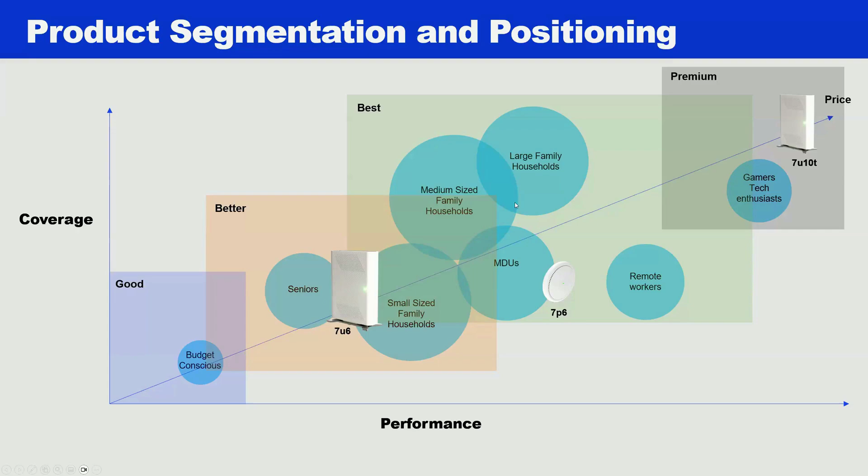We would love to say that everybody should be moving to Wi-Fi 7. That's not always the case, though. Wi-Fi 6 has a pretty large lifetime. I have other charts that I've shared with our customer base that indicate the adoption rate of some of the technologies takes time. So as we grow our portfolio, you're going to see this chart updated with other products that are going to fit a little bit more across the board. And if I click one more time, I'll show you the combination of products that fit, whether it be the Wi-Fi 6 scenario or the Wi-Fi 7 product family.

So again, a snapshot to consider when you're looking at developing a strategy for what system you'd want to use. Do you want to have all 6, 7 of these units within your purview? I don't think that's the best way to go. What we're suggesting is look at your sweet spot, consider what product you might want for that sweet spot, standardize so that you can benefit from cost savings associated with not only purchasing one or two of the systems, but also what it offers to you from an administration standpoint, from the overall installation process, the repetitiveness that you would go through over and over for your customers.

So with that, I'm going to ask a second poll question for you to participate. The question is relative to your market opportunities. So there's a mix here. There's 6 different options. And I'm really curious how broad you guys are moving in terms of your opportunity size. So we know that all of you are basically in the residential space, and we certainly expect that. But as you fill this out, consider the future. Consider possibly what you might have to be consuming in terms of the product in order to address those particular opportunities. And I'll give that a couple more seconds. And it's interesting, if you guys are watching the poll on the screen, I'm going to end it here pretty shortly, and you're probably not going to be so surprised by some of the numbers.

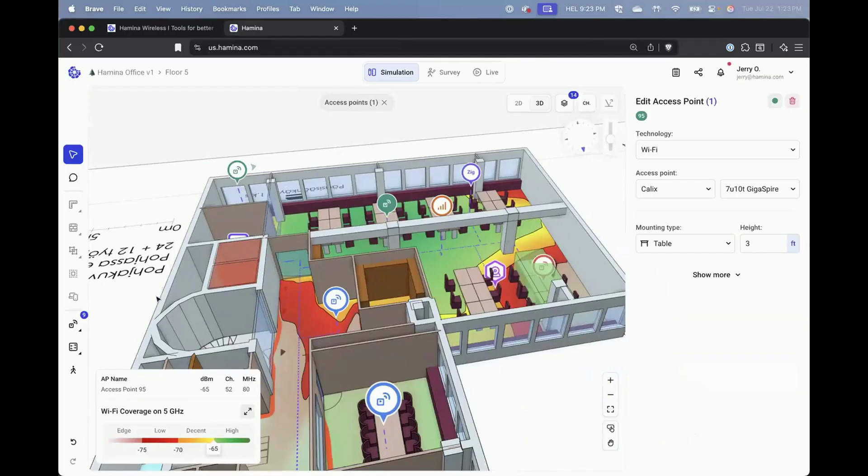So let me get my screen share going here, and I'll show you the network planner tool. All right, so let's jump into the Hamina Network Planner. And again, this is browser-based, so I'm just running this in my web browser here. If we go to the other tab here, I've already got my account logged in, and I have a project that I was working on previously pulled up. But let's start from scratch just to show you how easy it is to get started with the Hamina Network Planner. And I've got my colleague here, Joel, on as well to help me because I want to also show you how easy it is to collaborate.

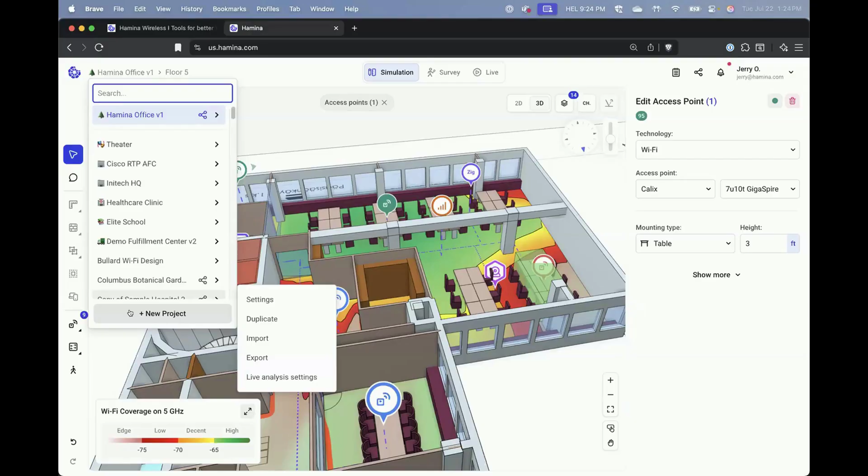So even if maybe you're not the wireless expert, or maybe you want to bring in some other expert to consult with, or somebody else within your organization to look at a project, we can do things like that as well. So what I'm going to do here is just create our new project. I'm going to call this one our Calix MDU. And we're just going to do a quick MDU design here.

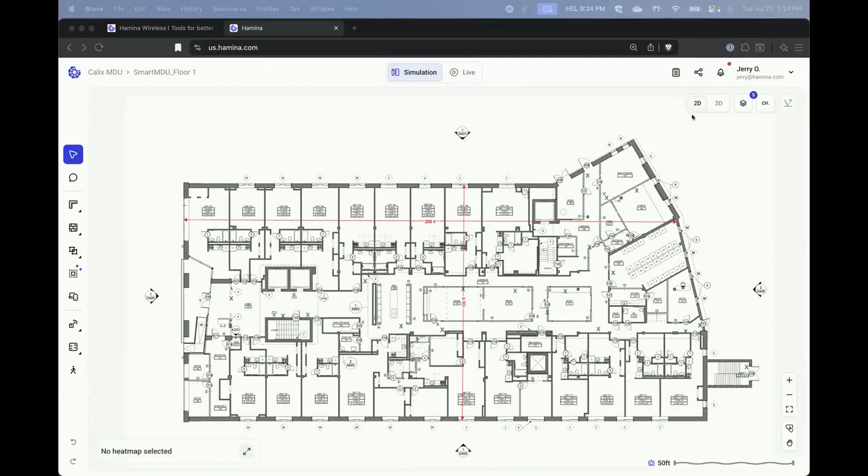So with a brand new blank slate here, I'm just going to drag and drop a couple floor plans in here. Now, when it comes to floor plans, these can be anything: JPEG, PNG, CAD files, PDFs, you name it, right? Anything you can get your hands on, even photos of a fire escape plan. These are JPEGs that I pulled in here, so nothing fancy about these. But the real power of Hamina is its ability to interpret these floor plans and understand, from an RF propagation model, what we need to model in this environment.

So in this case, it's identified, okay, that's a floor plan. It automatically set the scale for me. It also identified that there's walls and doors and things like that and drew those in for me. So very easy to get up and running with, and really minimal time and effort to start modeling an environment and simulating how that signal is going to propagate through this space. And obviously I can go in here and tune all the knobs. By default, it's saying, okay, I think there's some drywall, there's some wood doors. I can change that. I can customize the materials that are in the environment.

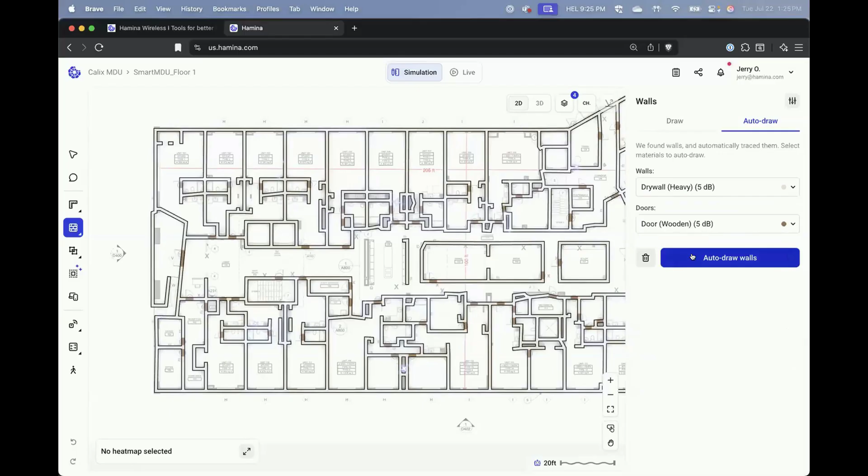I can add my own materials, but it's got a pretty comprehensive database here to help you get started. That's going to cover most common kinds of construction materials that you're going to run into. But even from there, like I noticed there's some elevators here. Right now, it just identified those thinking that's drywall around that elevator.

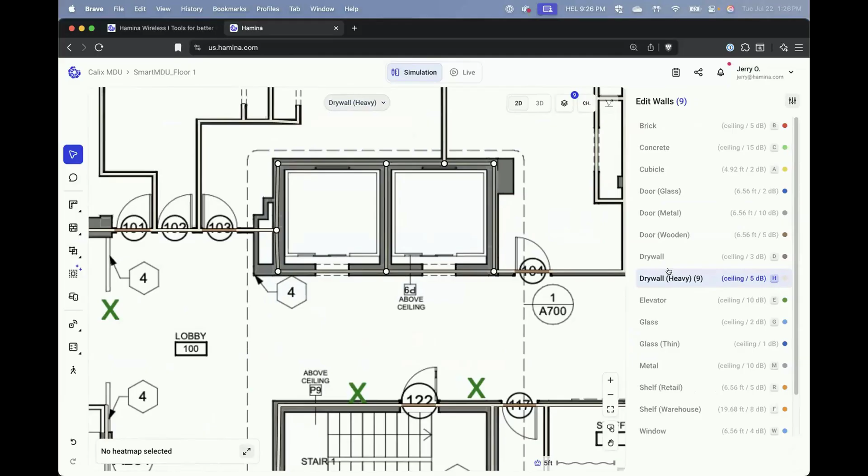So if I want to kind of tune this model here, for example, by selecting those walls, and I'm going to say, okay, those walls, all that heavy drywall that it's modeled as right now, is actually supposed to be elevators. All I have to do is select those, swap those out, and now you can see we've got some elevators drawn in here. So really at this point, we're ready to start doing our RF modeling if we want.

Also, before I forget, I'm going to share this project. So I'm going to share this with my colleague, Joel, and that way he also has access to it. He can kind of keep tabs on me. He can get in there and make some changes, but maybe that's just for project management. Maybe they want to just be able to track the progress of the design as they go through.

They want to be able to check in and see what the bill of materials looks like as I build this out. So you can share that project with either individuals or with teams of people as well. So it's very easy, being in the cloud, to collaborate in real time with other folks.

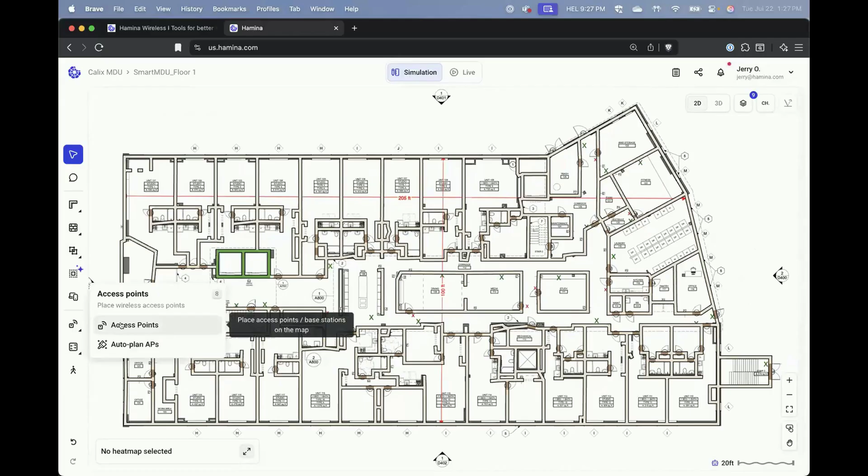But let's say we want to go ahead and place some APs in here. So I'm going to go ahead and select Calix here for our vendor, and we're going to choose from our nice extensive database here. And I know John was talking about a few different APs in his list. So let's try a couple of different ones for this design to play around with to see what might make the most sense. So maybe we want to start with something like a 6.3 here.

You can see right away we've got the antenna propagation model here modeled for you in 3D. So we can see if we put this thing on top of a table, that's essentially where the signal is going to go. The red or the darker the color, that's more of where the energy is being focused. So if we look at the bottom of it, we can see not much signal projecting downward. It's all kind of out in what we call omnidirectional.

If we look at it from the top, we can see it's really going in all directions around there. So a nice omnidirectional pattern, but it's meant to be put on a table. So that's going to be our default mounting. And then we can set the height of that table. So if you're putting it on top of a bookshelf, for example, you could adjust for that.

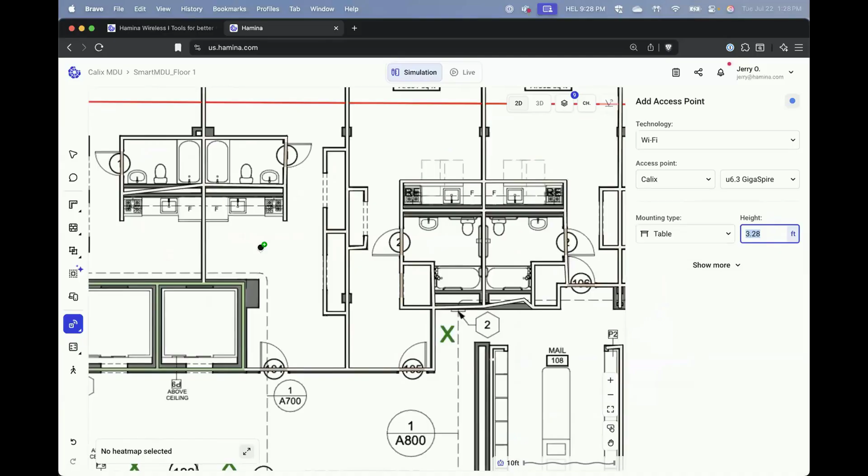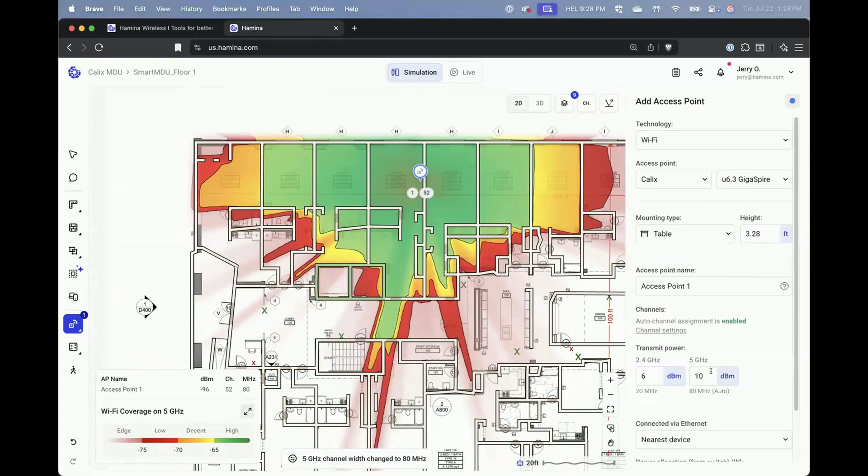But let's just place one of those in the environment here. And we'll place it kind of near this elevator. Maybe we would put it in the studio area, maybe near a wall. And now we can see immediately what that signal propagation is going to look like based on the default parameters of the radio transmit power.

So this is where things start to get pretty interesting, pretty powerful, right? Being able to that quickly simulate the signal and the coverage of this AP. So let's just focus in on having one access point in here, one u6.3, and what that signal propagation is going to be. And then let's go down to our client experience piece of this.

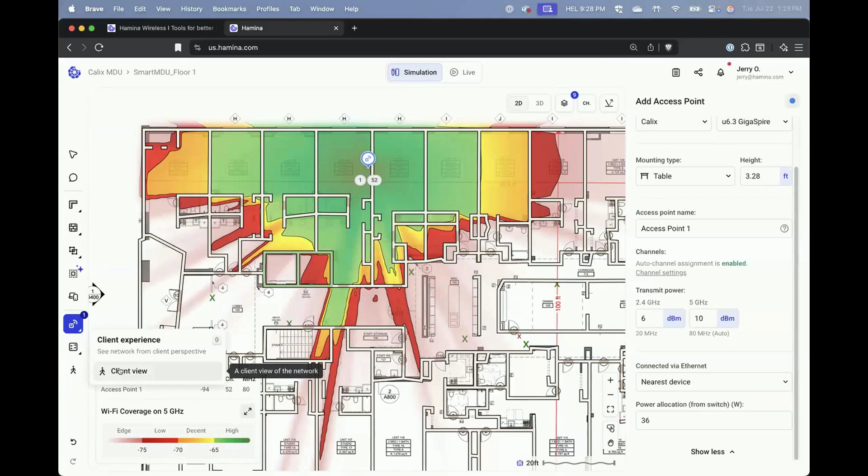So what I'm going to do is select a simulation here of a client. We can simulate different types of clients, maybe an Android phone. We can specify what that phone's capabilities are. John talked a little bit about their new Wi-Fi 7 product lines. Maybe we'll want to do some comparison with this particular model, not being a Wi-Fi 7 capable AP.

Even if we have a Wi-Fi 7 capable client, obviously it's going to work perfectly fine with that from a compatibility standpoint, but we're not going to get all the benefits of the higher MCS rates, the higher data rates that you'll get with a Wi-Fi 7 client. However, you can see even with this AP not being Wi-Fi 7, we're still getting very good speeds, very good throughput out of this one access point.

However, as we start to build this out, what's going to end up happening is we're actually going to see that data rate probably go down. And the reason for that is going to be that right now we're using 80 megahertz wide channels.

And that's great if that's the only access point that's in this space. But in reality, especially in an MDU space like this, obviously we're going to need a lot more access points. In addition, we've got to factor things in vertically as well. There's actually a second floor to this building, and there might be other buildings you're working on, let's say, that have 10 floors. We need to factor in the vertical signal propagation as well.

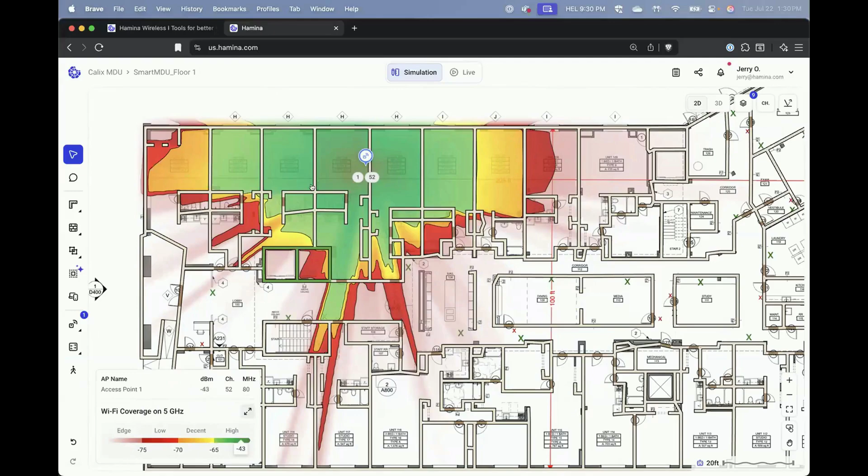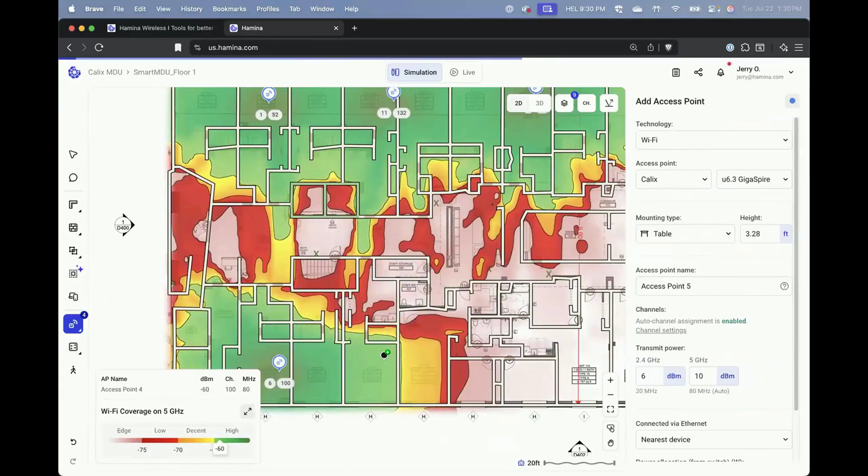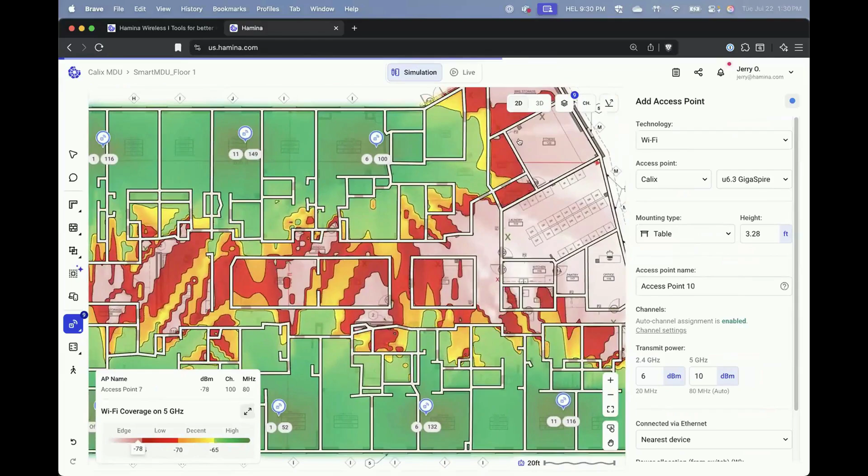So what I mean by that is as we start to build this out, if I just start to place maybe several more APs in here, one of the things Hamina is going to start to do is suggest different channel widths that we can use based on the number of APs that we have in this environment. So you'll notice as I continue to add more and more APs into this space, eventually it's going to tip the scales and tell me to use a narrower channel width. So as of right now, we're at 80 megahertz wide channels, but as soon as I add maybe another AP on the floors above or below, it's going to start to reduce that.

So maybe we put one in the study area here, maybe in this area. There you go. Now you can see, as I started covering the main areas here, because we've got APs on both sides of this, they're starting to actually interfere with each other with those wider channels. So now it's actually dropped our channel width down to 40 megahertz wide channels, which is a good suggestion. That's what Hamina is recommending here, based on some of the other automation features that Hamina has to help guide you on what channels and channel widths you should use in your deployment configuration.

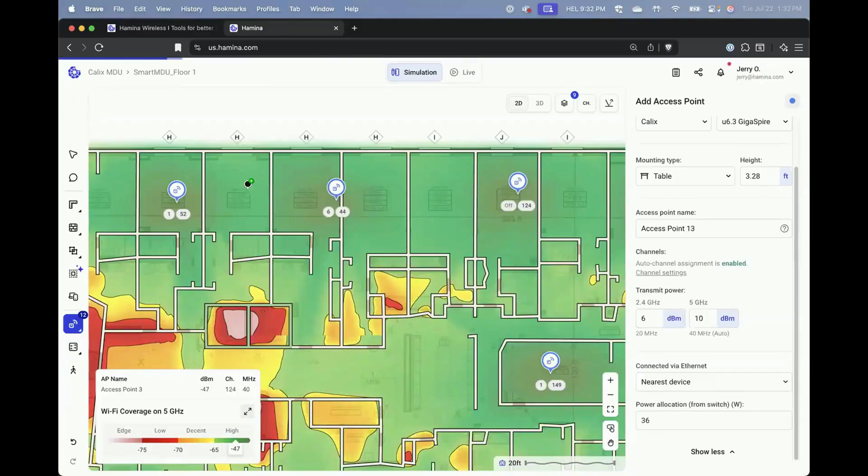So in this case, we're actually saying try to use as wide of a channel as possible because it's going to mean higher data rates, higher throughput, until we start to run into the radios themselves interfering with each other. And actually, in an environment like this, not only do we probably have our own APs to compete with, but we probably have other technology in that space that we're likely going to be competing with as well. So that's another consideration, especially when you do a site survey. It's going to show you what other types of interfering sources might be in that space.

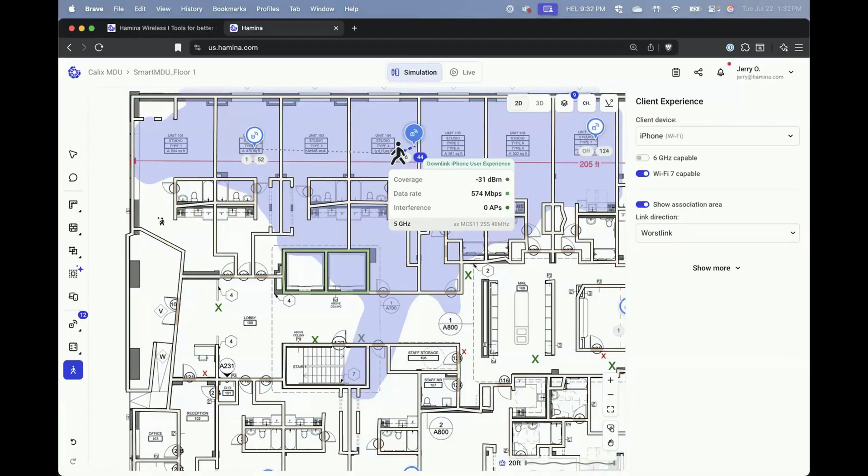But let's say we're good with this now, and if we just want to go back and validate our client, sure enough, our data rate did cut in half because it dropped our channel width in half based on the number of APs in this environment. So with this current deployment where we're using the U63s, this might be an optimal design for this type of space. And maybe that's going to be our starting point. And then we'll look at swapping that model of AP out for another model, maybe a ceiling mounted P4 as well to compare.

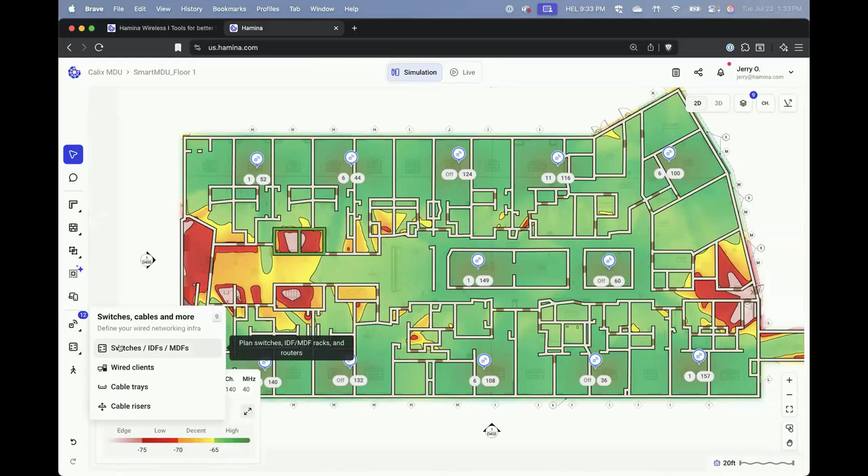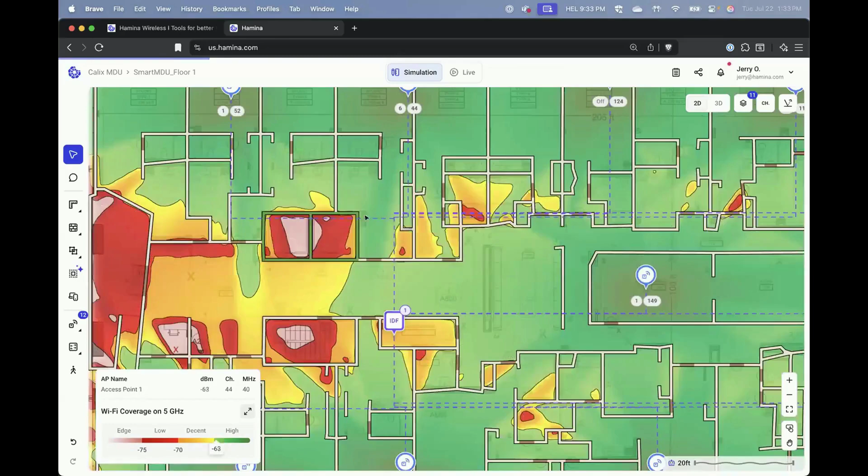But let's say we want to cable all this up, right? So one thing that we could do is input something like a switch or an IDF or an MDF to indicate where that is on this particular project. So let's say this storage room here is where our IDF is located. So I'm going to go ahead and place that on the map. And notice, as soon as I place an IDF on the map, it's going to route cable paths to all of these APs. Now, probably not the most realistic. I see I've got a cable going through the elevators here. So that's not going to work. But we can clean all that up.

And actually, I might leverage Joel for the sake of time here. I'm going to consult with him to be my cabler to actually draw some cable routes for me in this project. So he's over in Finland, I'm over here in the US, and I can actually leverage him to consult with to do some cabling for me. So with the IDF, that's where our equipment is going to be stored.

So MDF is our main distribution frame. IDF is our intermediate distribution frame. This is usually where the ISP comes into the building. That's where your MDF is going to be. The IDF is going to be off of that. So typically you're going to have your MDF where the main equipment comes in, and then maybe on other floors throughout the building, you'll have some intermediate ones.

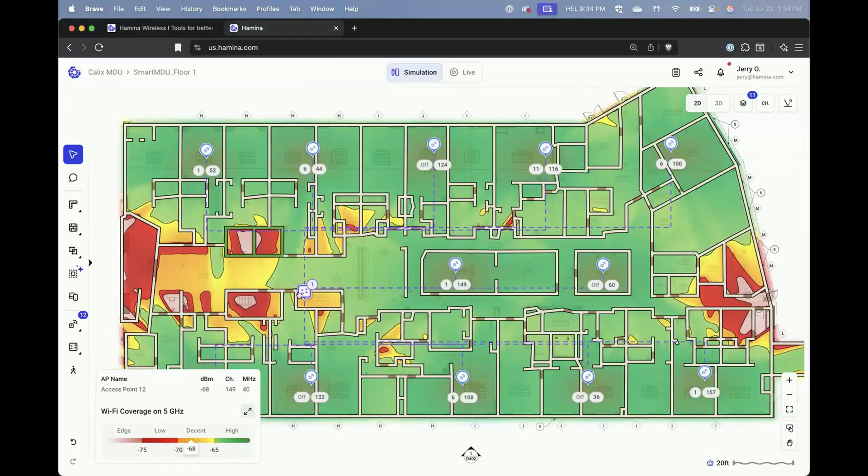Simpler than that, just specify something like a switch, right? That might be even more realistic for this type of deployment. You may not have a full rack and IDF and everything. We might just have a single switch or something in that closet. And that's perfectly definable as well. Yes, intermediate distribution frame. Thank you, Joel.

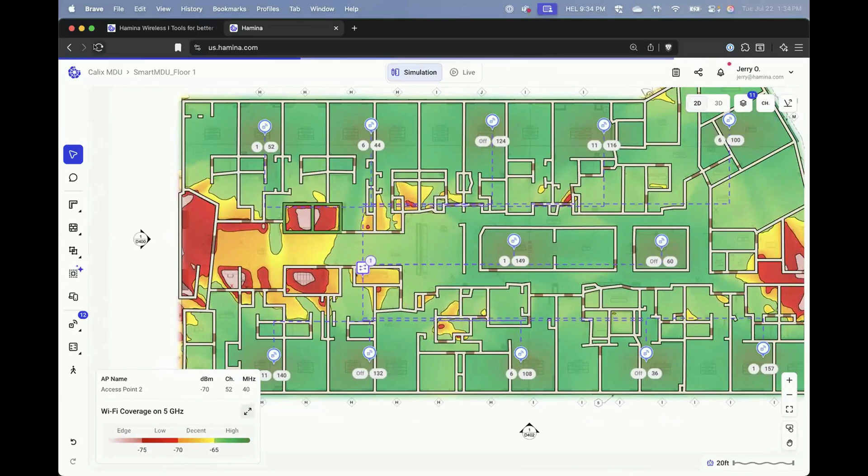All right, so let's say we've got this all defined and we need to clean this up. So Joel, are you able to do some cleanup of my cabling here? I did, yep. I threw some cable trays in there, and then it just snaps all the cables into the cable trays and routes them to the closest IDF, MDF, or switch. Beautiful. There you go. Oh, I missed one. I'll get that last one.

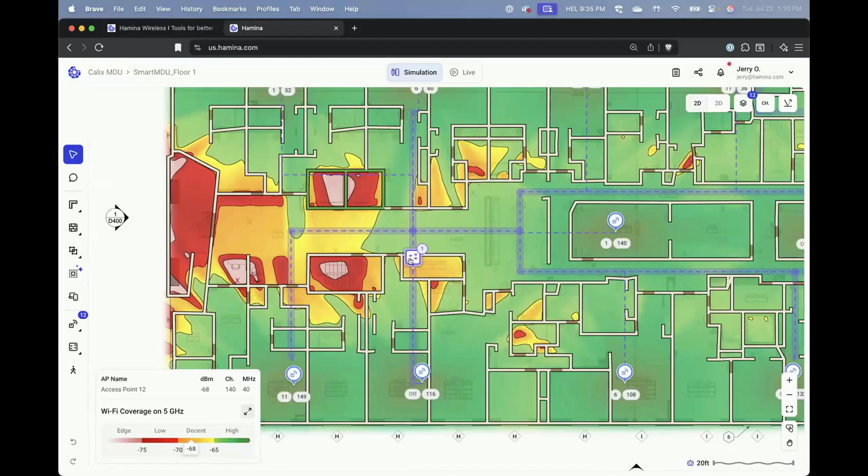Yep. So here Joel drew in these. I could have done it as well, but I was chatting away. So while I was explaining what an IDF was, Joel was doing all the hard work here, defining all these cable routes throughout the building to suck those cables into these cable trays, to tell the equipment how to get back to our switch here. And that can be for power sourcing equipment or just for data, in this case, since we have some tabletop APs.

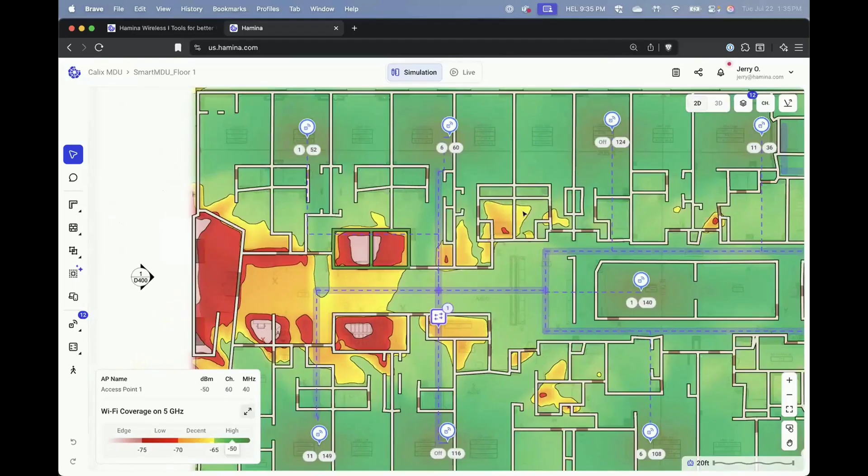But now that we've done all this legwork of modeling up this environment, all our walls and doors and all that kind of stuff, the cool part is we can run through all sorts of different scenarios really quickly, even with our cable trays and cable routes defined in here. So let's go ahead and swap out these APs. Let's select all those APs. Right now we have all the U6.3 GigaSpires.

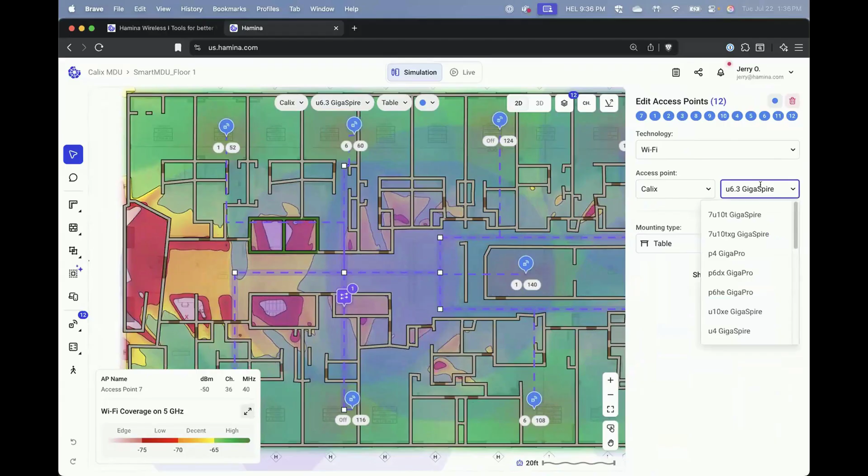And let's swap those out for something a little more drastic: what if we want to try putting some APs on the ceiling? We'll keep the APs in their current locations and I'll make them ceiling mounted. And now we can see, okay, if we put these APs on the ceiling, we can move these around and get them in a more optimal position.

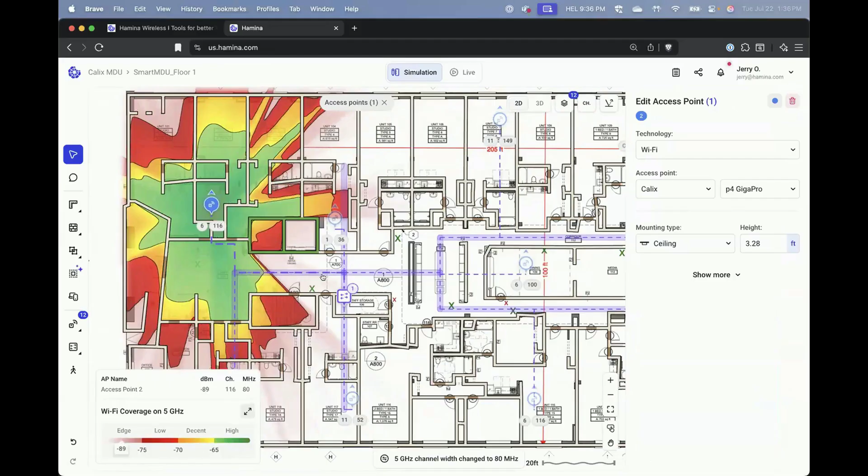And notice how with our cable trays already defined, our cables automatically recalibrate themselves into those cable trays. So that's the beauty of setting all this up, setting up where your wired equipment's going to be, where your APs are going to be. And as we move these around, you can see how they snap into our cable trays, so we can figure out exactly where we want to put our APs.

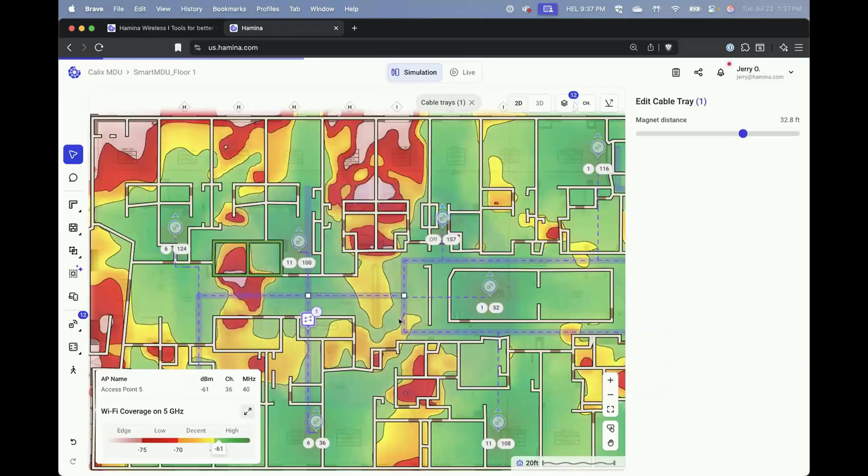We can also simulate different things like power levels. So now we're using a PoE powered device. If I come back to our switch here, you'll notice under our power and cabling details, with swapping out that AP, it's going to show me how much power I need at my switch to power all this equipment. So no longer are we using a tabletop, plugged-in access point. We're using ceiling mounted access points to show what that configuration is going to look like.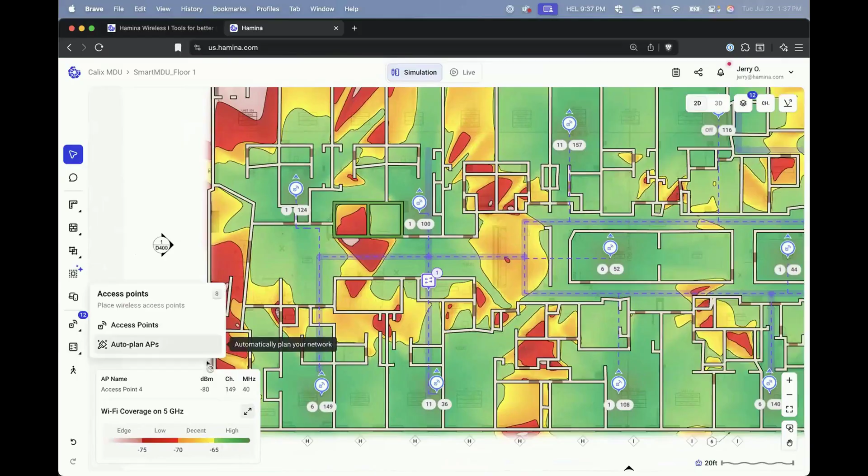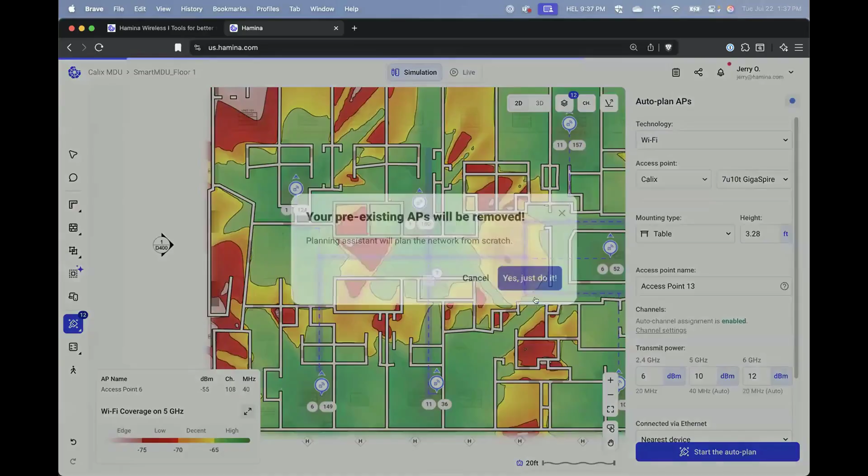Another thing that we could do is, let's say we want to simulate different models of APs, I can go to the auto plan here and we can choose different models of APs and run a simulation. You could pick the models you want to simulate with and just tell it to do a design that meets specific criteria. As long as it's more of an omnidirectional AP, you should be able to use this in this type of environment.

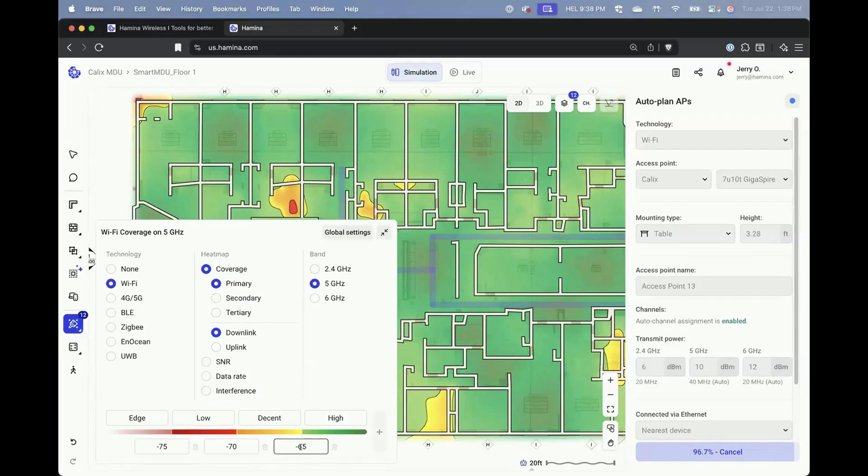So what it's going to do here is take all the information that we've input into this project so far about the environment, but also the requirements, saying we're going to have a specific target of good Wi-Fi. So if we need to design Wi-Fi for an entire building with very little effort, this way we can do it very quickly.

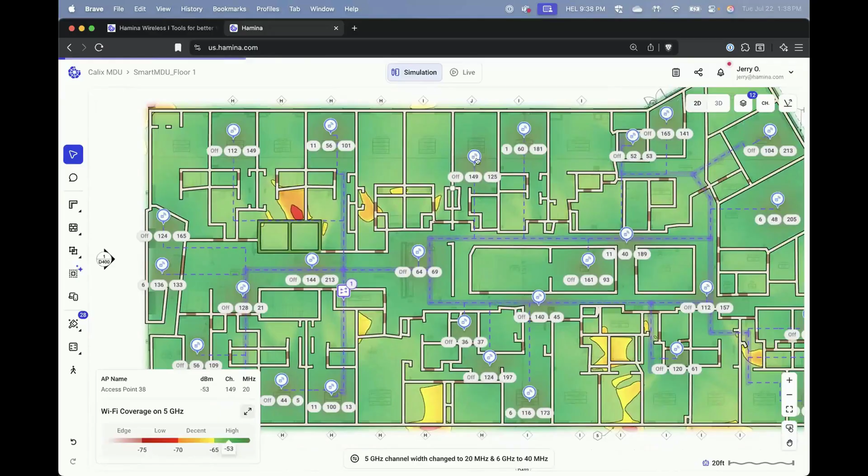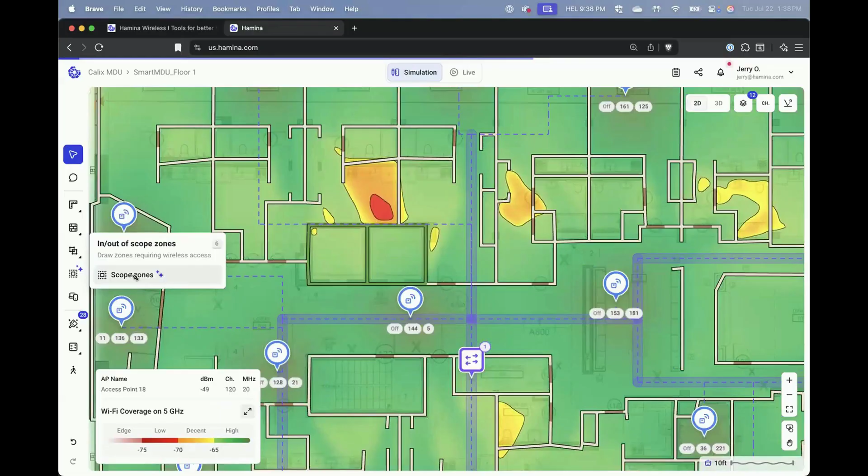So here it's placed all the APs for me in all the areas that are currently defined as in scope, but maybe there are areas that we want to mark as out of scope. Right now it's even trying to cover the elevators. So in this case, maybe what I want to do is say the elevators are going to be out of scope.

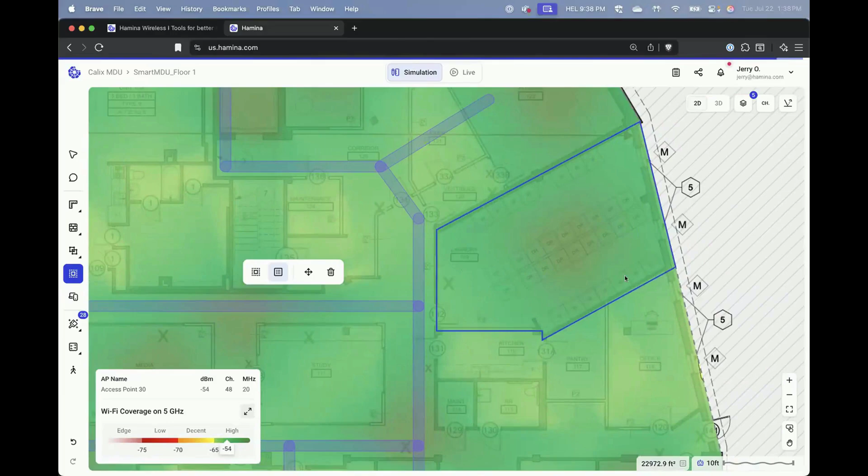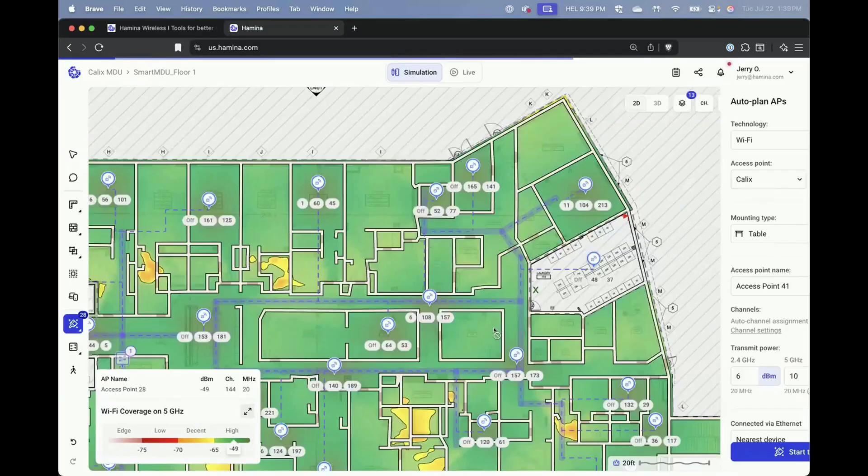We don't need Wi-Fi maybe in there, maybe the same for the stairwells. So you can mask those areas out from a project and actually input what areas are needing coverage, this laundry area, let's say, just to mark a few other areas as maybe out of scope. Maybe if it's like mechanical areas, you might want to also mark those areas as being out of scope as well. So in this case, we'll mark this area as out of scope in this project, and then you can rerun your auto planner to try to design around those areas.

So very easy to run through multiple scenarios. Jared, there was one question in the chat from Anthony Simmons asking, with the exclusion and attenuation areas, the predictive also considers wall dB measurements or obstructions, correct?

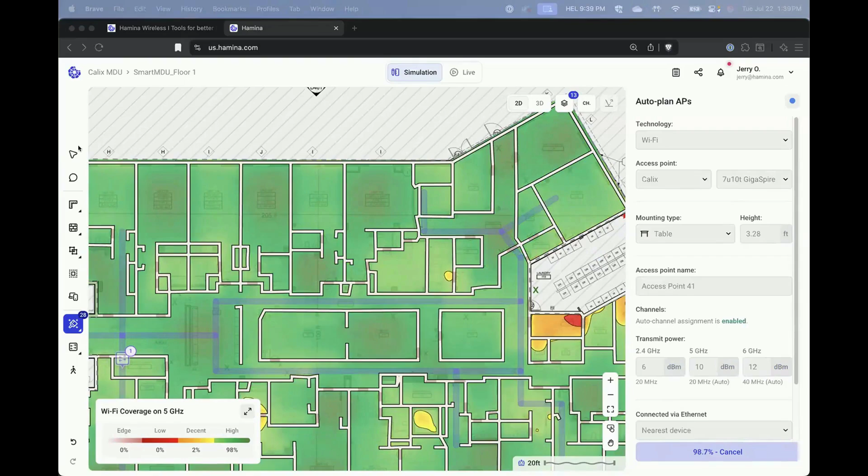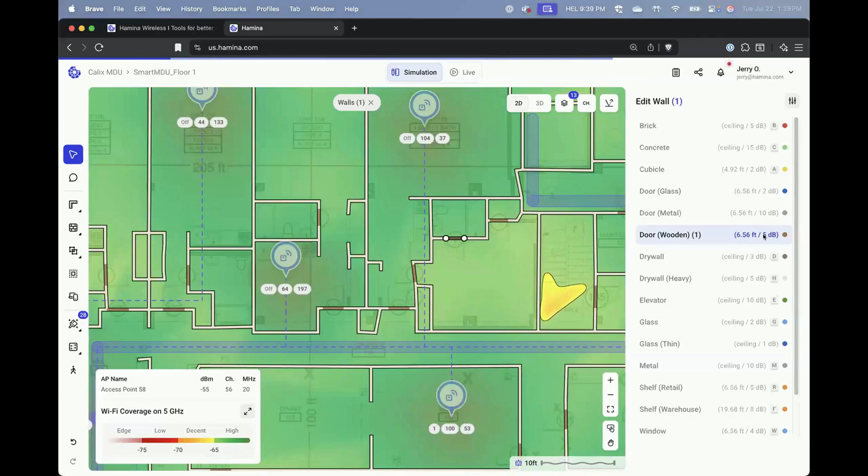Correct. So in this particular project, what we're factoring in is, if I go to the walls and select one of these wall segments here, we're saying drywall, and that's a 5 dB loss. So that is attenuating the signal at 5 decibels as it passes through those interior walls. In addition, we also have modeled things like the doors, and that happens to be a wood door, which is about the same attenuation properties as a heavy drywall of 5 dB.

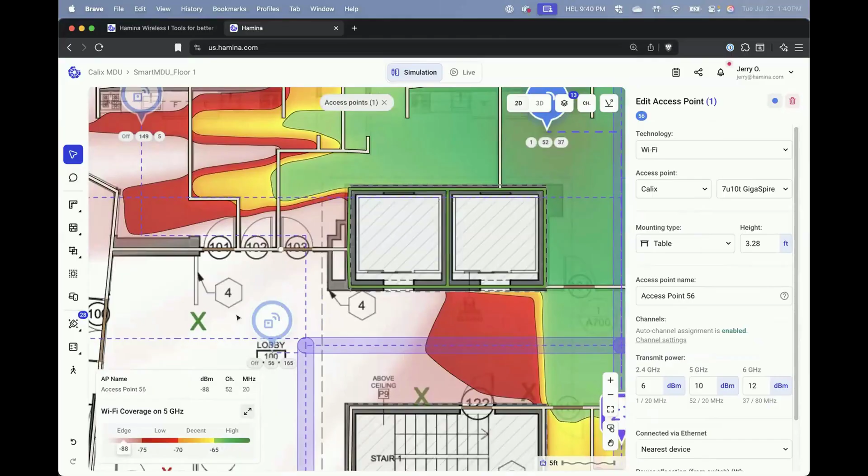But then if we go over to our elevators, big difference there. That's 10 dB of attenuation for each of these elevator walls. So very high attenuation in comparison to the rest of our interior walls. And we can see that here, if I select a single access point, we don't even really get any signal out the opposite side of the elevators, versus where we have just our walls. You can see it's evenly spreading throughout this space.

Thank you. Yeah, thank you for the question.

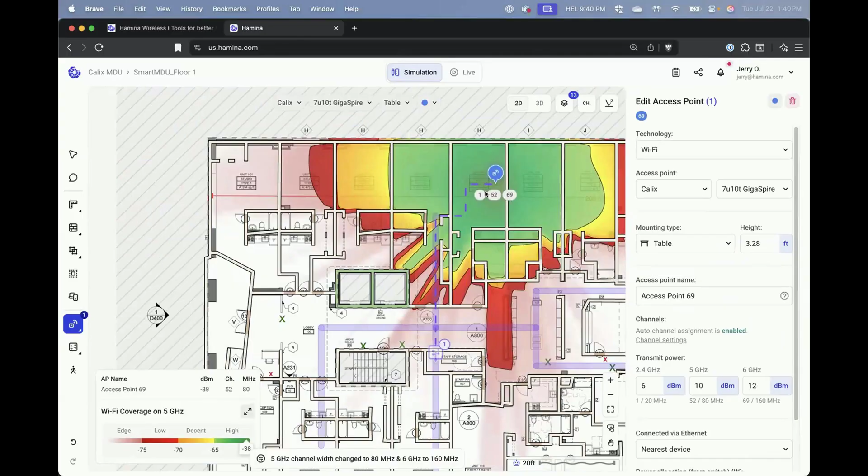Let me show you one more thing here around AP placement. Especially getting into Wi-Fi 6 and Wi-Fi 7, and specifically 6 gigahertz capabilities, I'm just going to place a single AP on here. What if we put the AP at the front of the unit to start? I want to show you how big of a difference this could have on the user experience. If we install the AP here, but the users are primarily going to be using the Wi-Fi in the back part of the studio, what does that mean to the user experience?

One, I can see right here, most of this energy is bleeding out into the open area here. We're losing a lot of that signal in this back area. So if I select a client here, and we take an iPhone, and we'll say in this case it's going to be 6 gigahertz and Wi-Fi 7, and we put that user back here, we can see they're still getting a good user experience. And again, this is with the Wi-Fi 7 capable

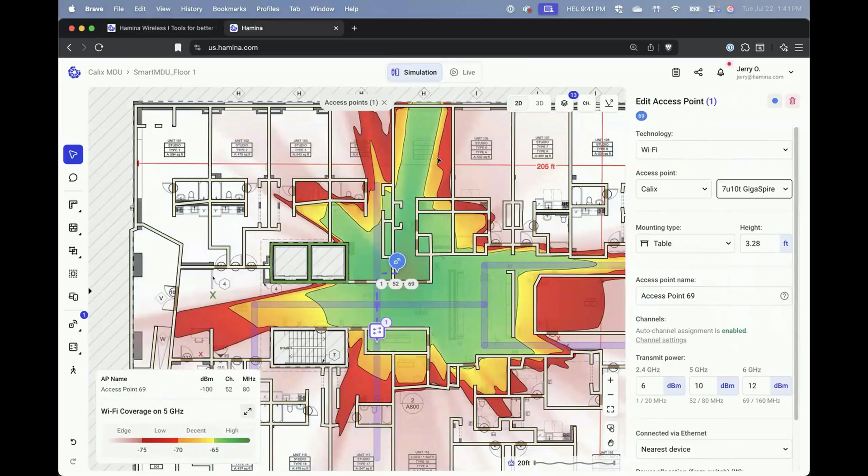7U10T in here. Just to show you with the Wi-Fi 7 piece of this, how close these clients need to be to get that full performance, especially if you've got somebody more critical that really needs the highest performance possible. Watch how close they need to be. As I simulate this client experience, notice how quickly that connection, not necessarily deteriorates, but the speeds start to drop, to get the full benefit out of these APs, which is crazy.

We can get over 2,000 megabits per second when the user is right next to the access point. Look at that, almost 3,000 megabits per second when we're using a 160 megahertz wide channel. But you'll notice as I move away from the AP, even just so many feet, they start to lose that. And if they come back here and around the corner, very quickly we're starting to lose this. We're still on 6 gigahertz, but at a pretty poor connection quality, still about 500 megabits per second. And right there, they actually just jumped over to 2.4 gigahertz.

So yeah, if you're putting this in and the client's really expecting really high performance Wi-Fi, high performance internet, it's going to be really critical where you put that access point. Versus if we just take this access point and move it to this side of the unit here and repeat that same process, you can see now they can go anywhere in here and still be getting over 1,000 megabits per second. If they're right next to it, we're back up to almost 3,000 megabits per second.

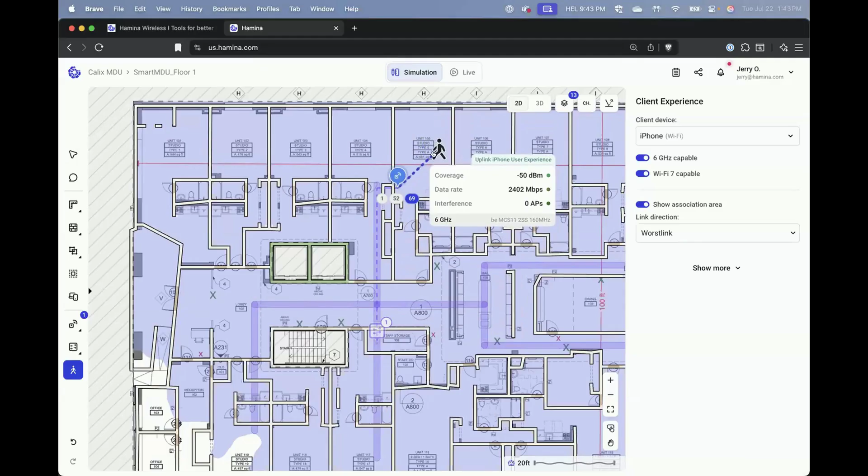Now that's data rate. So keep in mind, my rule of thumb is anytime I see data rate, I always divide that in half to get real world TCP throughput. But yeah, this is just to show you how important it is to get that AP in the right spot, right? AP placement's important. That's my whole thing out of that rant.

Jerry, sorry, we've got a couple of questions in the chat. So you're showing indoor designs right now. Could you do this for an RV park as well? Absolutely. Actually, I think I have a demo RV park in here that we can show pretty quickly.

And Joel, thanks for the awesome cabling work there. I appreciate it. I was gonna share this exact one with you. Looks like I already did a long time ago. Yes. I think this actually might be one that you designed. So it kind of comes around.

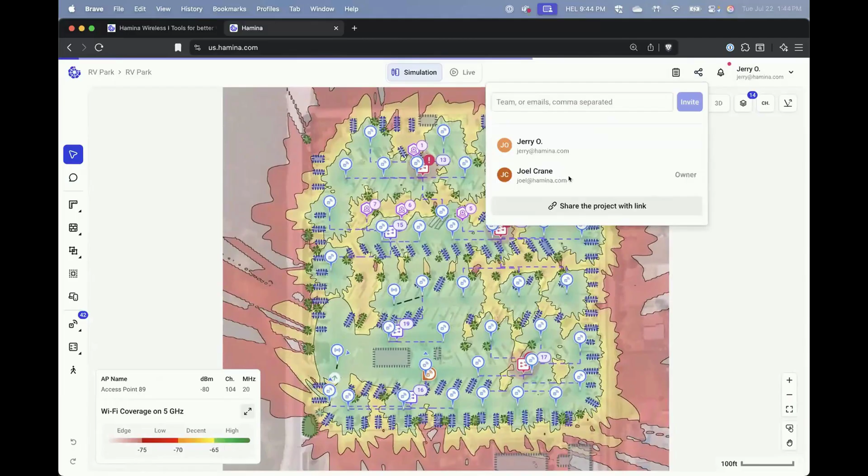So Joel actually did this design and shared it with me, but I'm going to leverage this, and I hope you don't mind, Joel. I'm going to duplicate this, delete the APs off of here, and we'll just do a quick design with your handy RV park here. Yeah, go for it. So we're collaborating once again. Joel set up this project in the past.

I'm just going to clean this up a little bit here, and we're going to start with just the environment, and then we're going to add some stuff. So I'm going to get rid of our wired clients. We can also model those in. And now we've got just some walls and attenuating objects. This is a pretty rudimentary one, I would say.

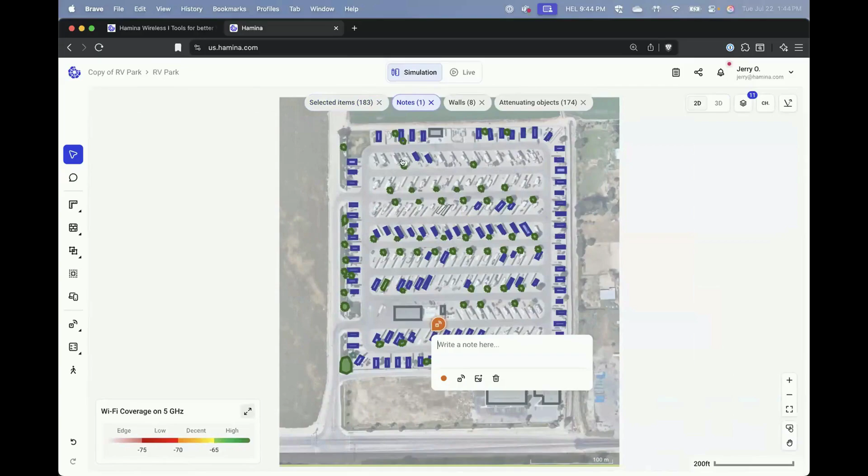We could certainly do a lot more detail, but just to give you some idea of what we've got modeled in this space, we've got some buildings, some trees, some RVs themselves. This gets us good enough for a quick demo. But let's say we want to model this RV park. What do you guys think? What would be a good AP for this type of outdoor setting? P6HE. Okay, let's go with the P6HE.

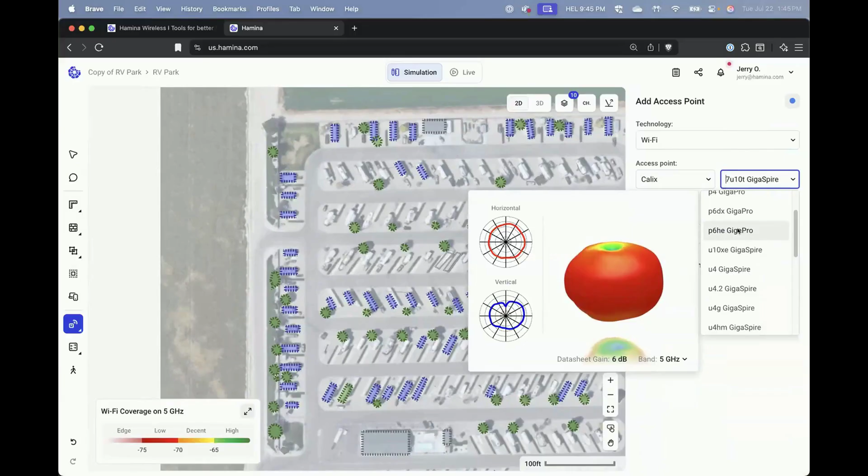And again, we can see those antenna plots here in 3D. Let's go ahead and select this. And Jerry, quick question on the 3D antenna graph that you just had. I know you have the free version. Does the free version also show this, or is that part of a paid license? It does.

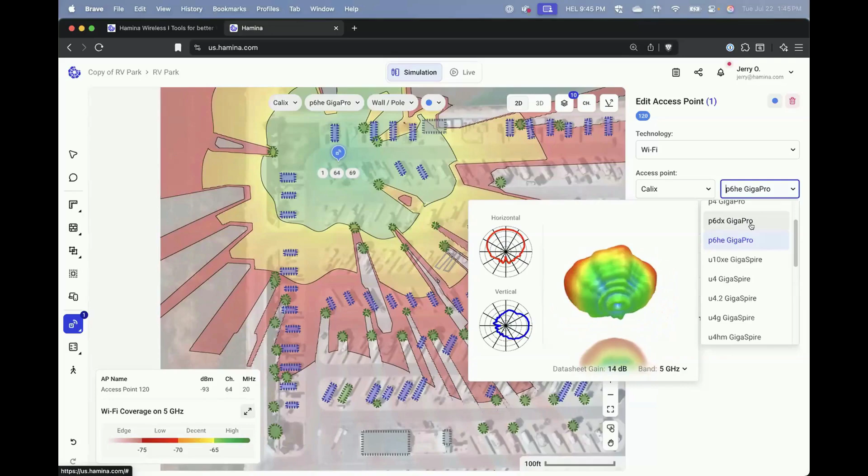And I hear people all the time say they'll sign up for a free license just because they need to validate something with an antenna, and we freely make that accessible to you to view those antenna plots. Now, if you do have the paid version, Joel, correct me if I'm wrong, I think there's options to download some of the antenna plots from third-party antenna manufacturers, where if you're a 3D printer guy, you can actually print those out in 3D.

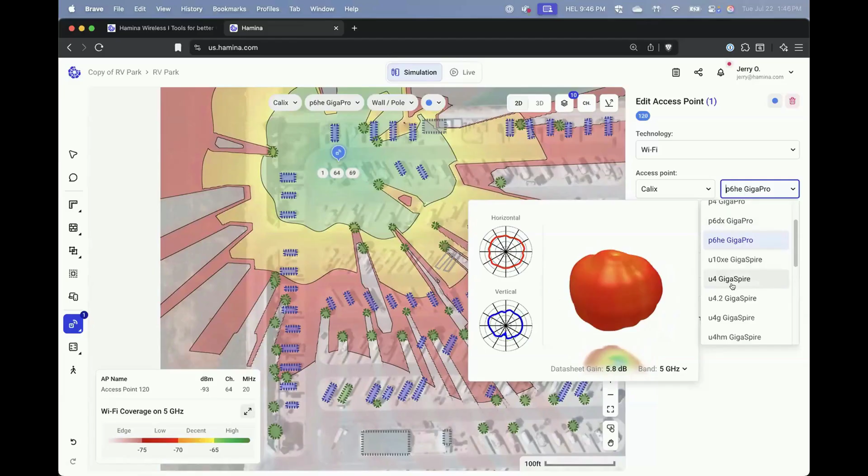Not for Calix, but John, we should chat. We can flip the switch on that. Yeah, you can download some of them from certain vendors that allow us to do that, if you want to be able to print this out.

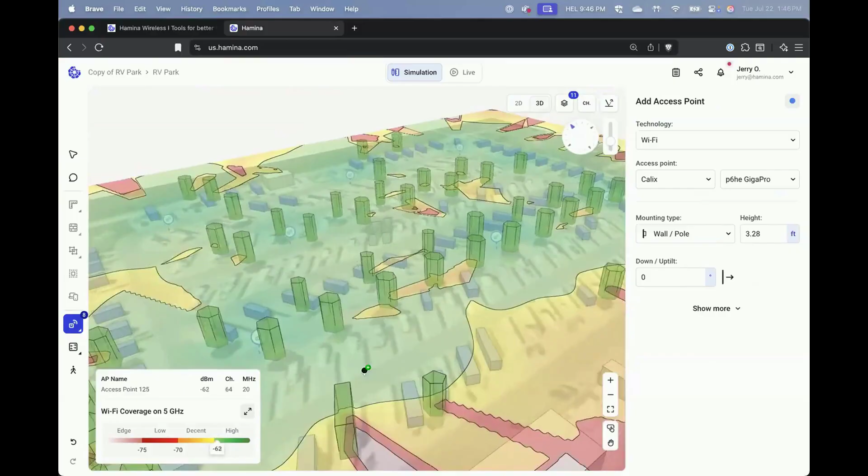All right, so I'll wrap this part up, but you can see we could build this out pretty fast. Same concept, and it does support multi levels as well. One thing I think is pretty cool, especially with an outdoor environment like this, is you can change the visualization height you're simulating. Being that this is a fully 3D capable tool, I can come in here, and it looks like last time I was playing with this, I was at 16 feet.

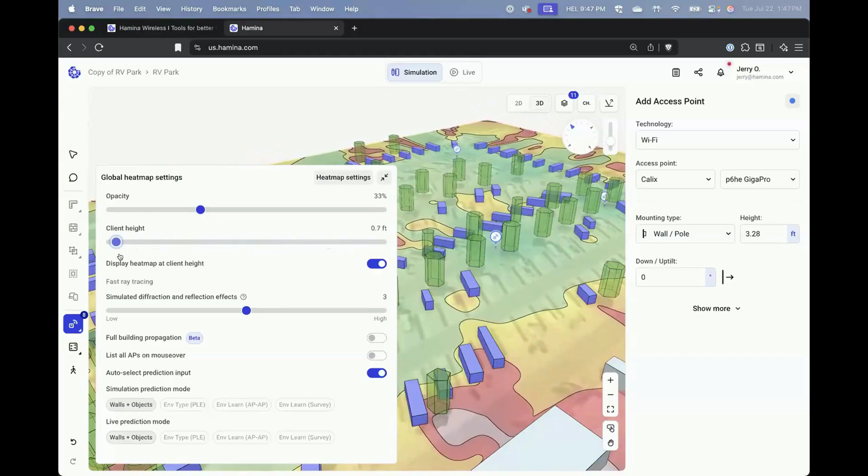So let's actually bring this down to more of a ground level visualization. But if for some reason you need to do like a point-to-point link or show something higher up in the air, we can adjust that visualization height to show where we want to see the signal. So yeah, it's very flexible in that sense.

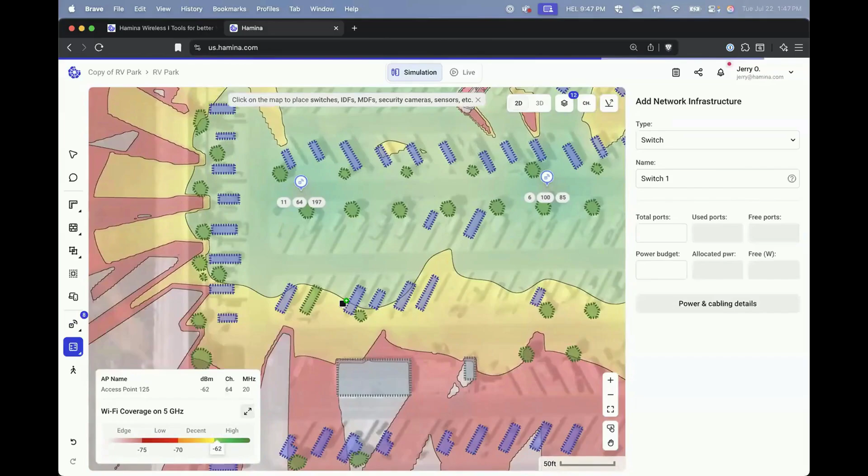Same kind of concept for the wiring side of things. So if we did want to wire all this up over PoE, I could go ahead and place a switch on here. Let's say maybe we just have a switch in this corner over here. And notice what it's indicating here is we're going to have some problems, right? A lot of these cables, if that's our only location to wire things to, it's going to flag any of those that are over that 100-meter distance, saying that those cables might be out of spec there.

So we might need to look at getting more creative with some fiber or adding some additional switches. But it'll help guide you through that. So as I add maybe some additional switches in here, we can figure out how many switches we're going to need, where those switches need to be placed to make sure we can get everything connected and within spec here.

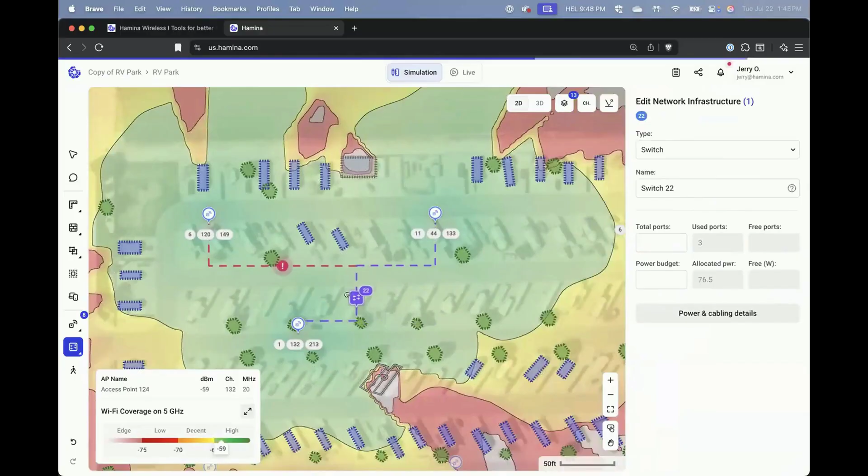Well, cool. John, I will turn things back over to you. Hopefully that's a good stopping point from my side. Fantastic information, Jerry. Thanks so much, and apologies for pushing you along there. So I wanted to see if we can get to some questions, you guys, and just wanted to wrap up our piece.

So a couple things just to align here. All the material that you just heard from Hamina, from Jerry and Joel, coincides with the idea of picking and choosing the right products for the fit. You could use that tool set to help you along. Obviously, there are pros and cons to whatever product you select, whether it be a desktop or ceiling mount. It will do the same thing for you as you showed in the RV park for outdoors. So the combination of these two things together will go a long way in determining what your next steps are, how you should synergize on a particular product or a couple product families.

So we've covered all the challenges. We talked about some benefits of standardizing. We certainly went through some of the positioning, whether you would utilize the same positioning or not, that's entirely up to you. It's just an idea. And then finally, with the network design, I want to leave you with another thought, that all of you have access to your success manager that can help you go through some discussions around predictive Wi-Fi design. They don't necessarily utilize the tool. It's more of just a general conversation. We would encourage you to lean on them when necessary or when it's a possibility.

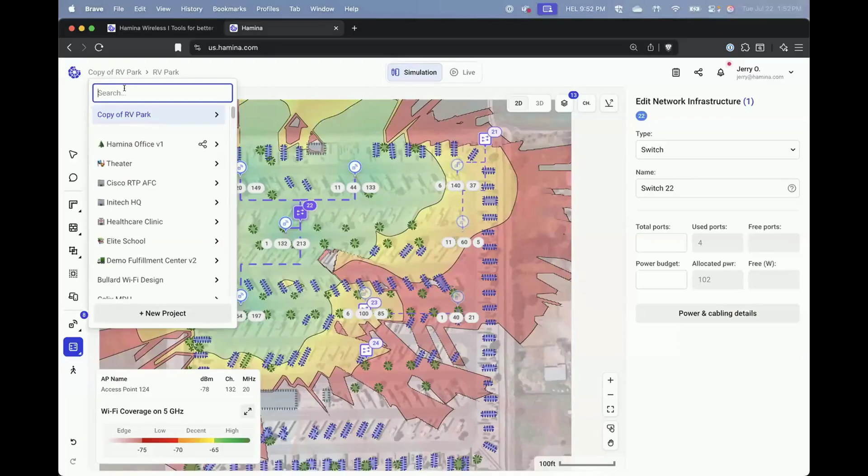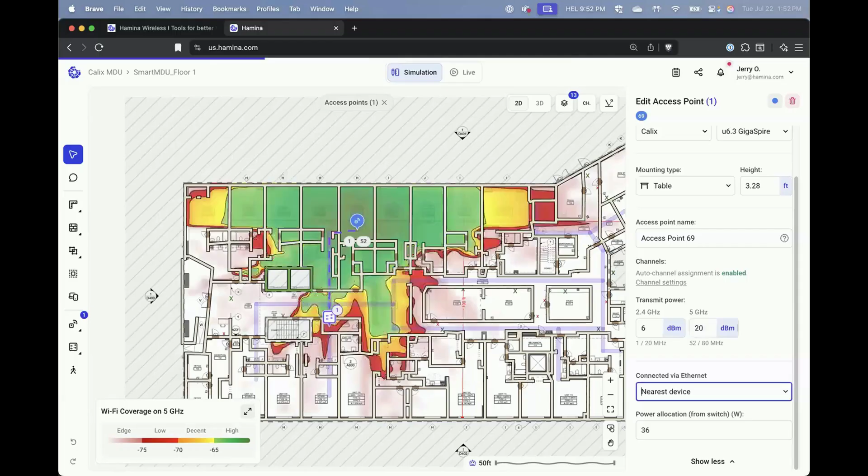So let's swap that back to a U6.3 here. And so the default here, we've got some different power levels configured. At first thought, you might think cranking the transmit power up is going to be best, like full power all the time, right? But let's say if we do crank this thing up to something like 20 dBm, we get a much larger kind of green area.

But depending on what our goal is, if we're just trying to get users that are in this unit to connect to this AP, now we're actually interfering with a lot larger area as well, right? So if we need to try to cover this entire building, you'll see as we start to place APs in here, even with fewer access points, we're going to run out of channels, and that channel reuse is going to start to be affected even more quickly. So you can see that's a good point.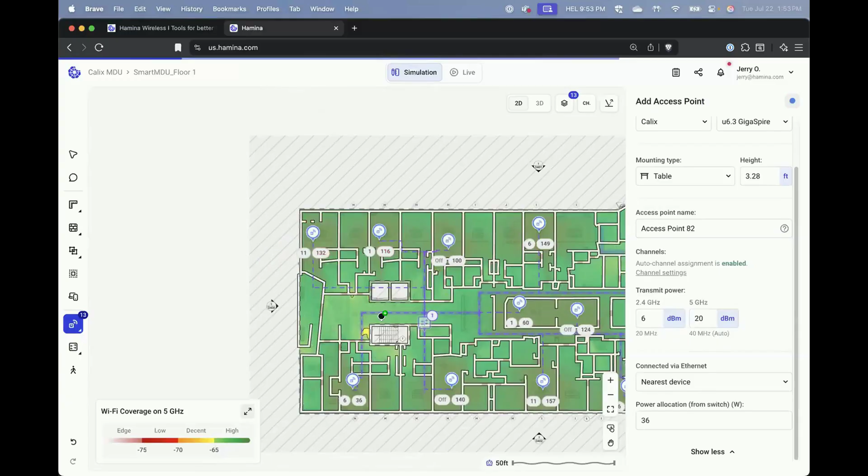Sorry to interrupt you, Jerry. I just wanted to add something because somebody asked, can your tool help with channel planning? Yes, absolutely. I think it's pretty straightforward. Go ahead. So not just the channel planning piece of it, but also the channel width piece of it, which is often the more challenging piece, right? Trying to figure out what is the optimal channel width that we should be using.

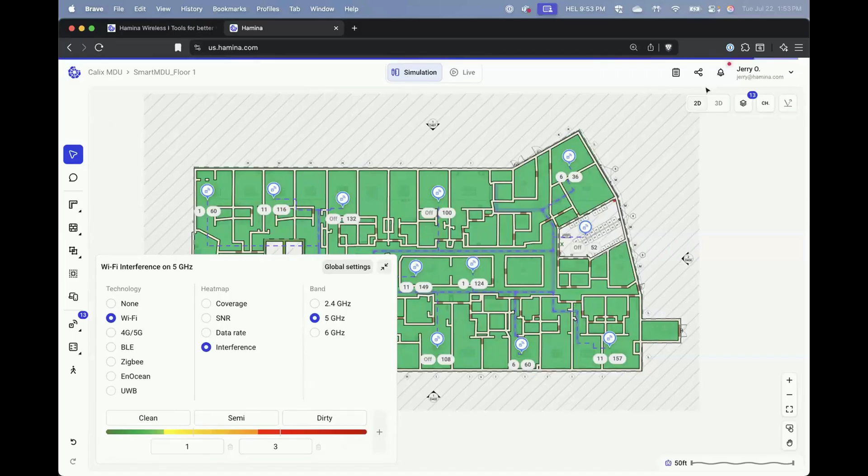Most people think, oh, we'll just use as wide of channel as possible, bond as many channels as you can. But in a multi-dwelling unit like this, you run out of channels, and then what you create is what we call channel interference. So if I come in here and override the system that's already optimized this, and say we're only going to use 80 megahertz wide channels, notice now we're fighting for airtime and actually needing to share these channels. That's what the yellow is representing, kind of dirty air, if you will, co-channel contention is what we'd call that.

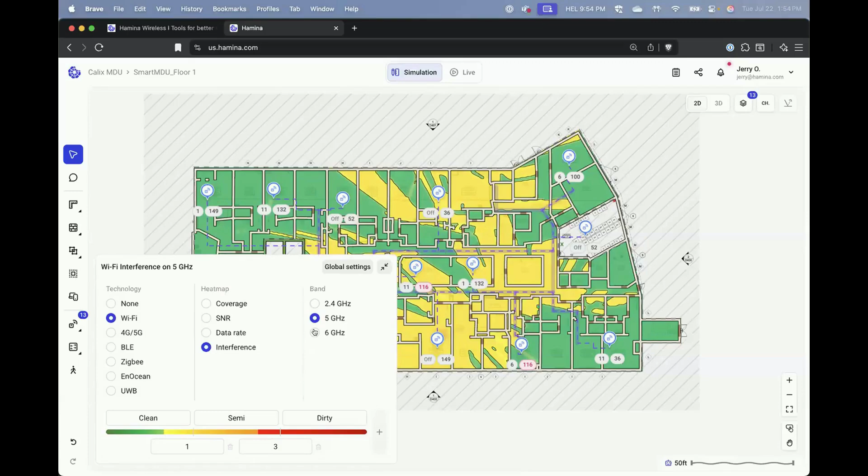I wanted to remind all the attendees, when you model with Wi-Fi 7, you're introducing a whole new level of spectrum. Within an MDU space, we find that Wi-Fi 7 really is an ideal solution, because you have more capacity and more connectivity. Speeds are going to be improved, very similar to what Jerry showed you in terms of performance, but it also gives you the opportunity to support a large number of devices, which is another factor in the MDU space.

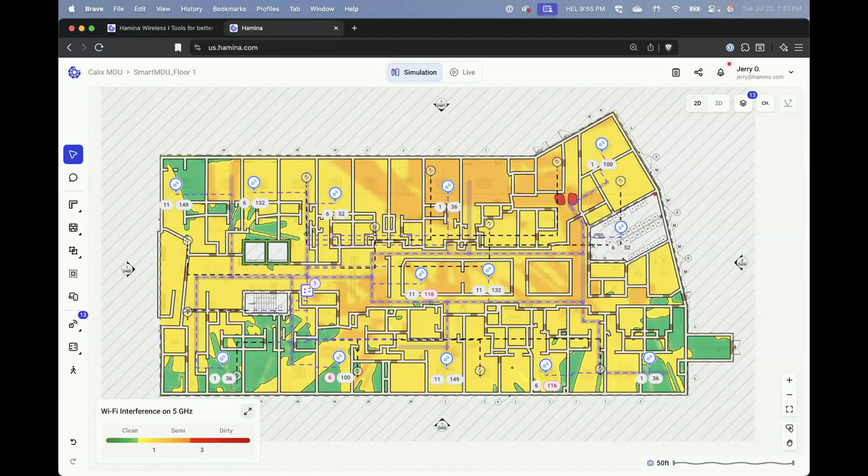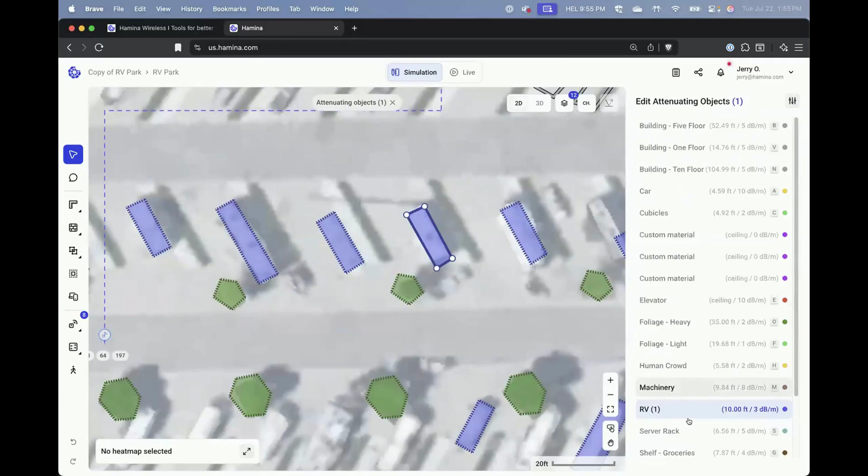So, outdoor example: can you set the dB loss for some of the RVs? Yes, that's what we've done here. If we come into this project and look at the RVs, like I said, this is very rudimentary. We could certainly do this in more detail, but we created a custom material called RV, and we're specifying an attenuation: as the signal passes through that object, we're absorbing 3 decibels per meter. So it's a dB per meter value. Obviously the thicker the object is, the higher the total loss.

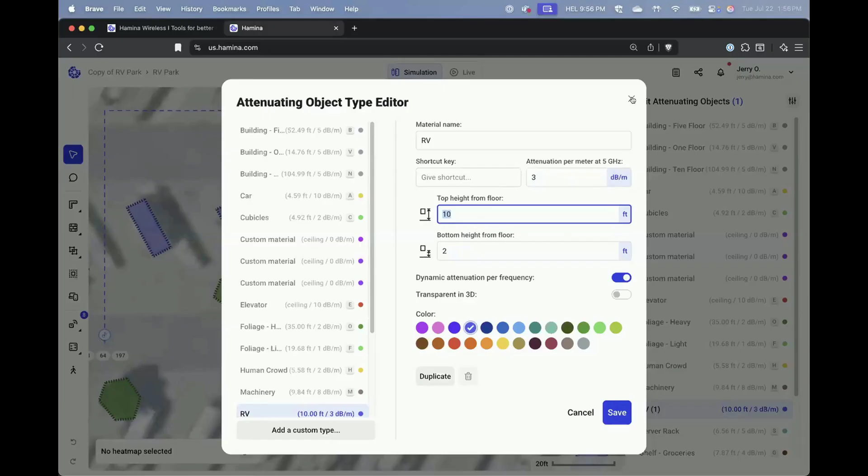But literally it's as simple as that. You set a bottom height, saying it's starting 2 feet off the ground, going up to 10 feet at the top, so an object that's 8 feet tall. And if we look at this in 3D, we can see that a little better as far as the objects we've modeled.

So that's what that's looking like. Jerry, if I remember correctly, I did this project. This was just a hypothetical, but I was doing this with John Kicklighter from Calix.

And if I remember correctly, I asked him, "Hey, John, do you know what the loss of an RV is?" And he said, "Yeah, it's about 3 dB per meter." So he knew exactly what the number was off the top of his head. But typically, what you do is set up an AP, take a couple measurements, and you can calculate what that is really, really fast. But John had already done it because he's a pro.

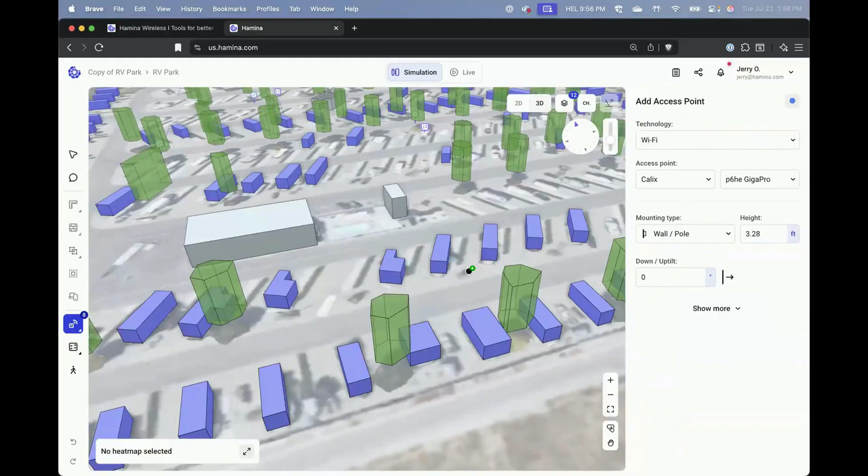Okay. Any other questions from our attendees? Yeah, there's one from John Hardwick. So, Jerry, the question: is there a library, the ability to enroll third-party APs into Hamina, or is that not possible? Joel, what do you think about that one? You want to take that one?

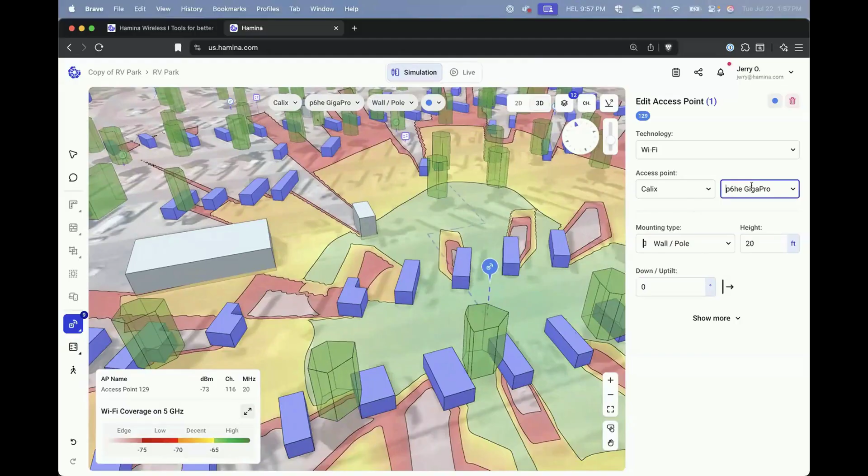Yeah. So we are vendor agnostic, and we support basically whatever. So if there's a competitor's APs that are there already, and you want to get an idea for what a swap is going to look like, chances are their stuff is in our tool. So you could potentially drop their stuff in, and then use that to make a case with your customer for why it's time to upgrade.

For example, you could put some older AP models in there and show what the roaming performance is going to look like, what the data rates are going to look like, and then swap in the Calix gear and show your customer, hey, here's what it's going to look like in the simulation with the new network. So anything that you need, let us know, and we will get that added.

And by the way, there's at least 2 new models, I think, coming down the pike from Calix soon. Antenna Guy's on vacation right now for the summer, but as soon as he's back, we'll be getting those in. So there's going to be more Calix gear coming to Hamina really soon.

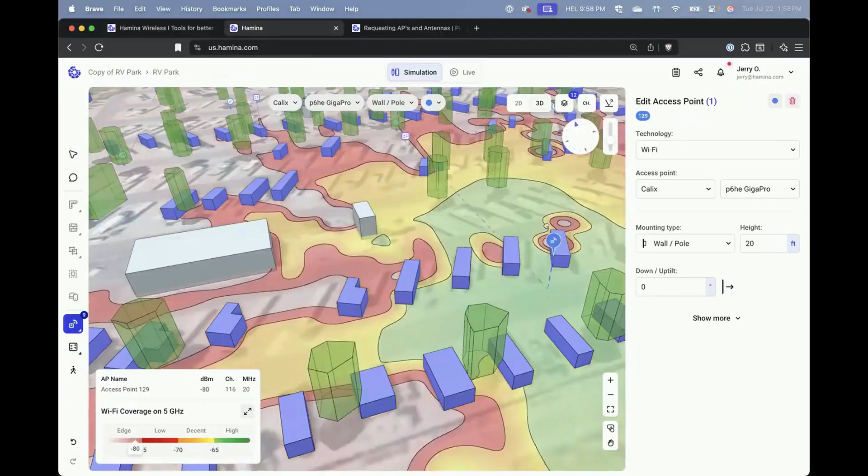Okay, that's awesome. There's a second part of that question, which I think could be a whole other seminar. Once a plan was developed and it's time for real world application, is there a way to update actual signal strength data and throughputs? Yeah, good question. So typically, the way that we handle that is instead of putting in throughputs and things like that in Hamina, you can go and perform a site survey.

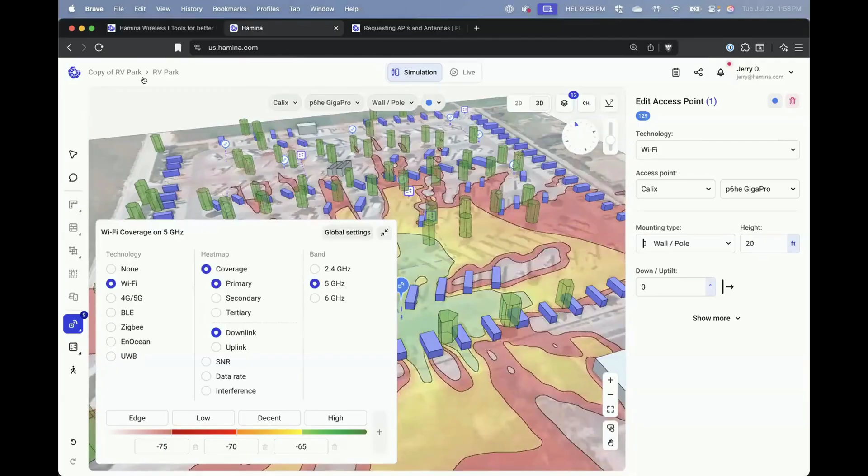So what Jerry's been showing you is what we call predictive modeling, or sometimes network design, where he makes a model, we drop APs in, and we're modeling what we think the network is going to look like. Typically, the next step is after you have deployed the network, you can validate it by performing a site survey. That's when you walk around on site with a measurement device.

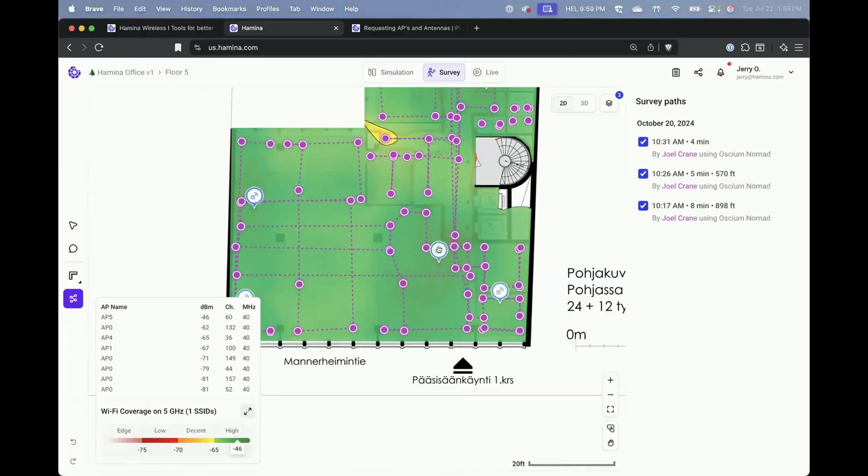So this is actually our office here in Helsinki. You can see that back in October, I did a site survey here. You can see where I walked and where I tapped on the map to tell the tool where I am. And then it automatically found all of the access points that are nearby. The great thing is not only does it find my network, but it finds everything else, so you can tell how much interference you're getting from your neighbors.

So it's an app that runs on an iPhone or an iPad, and there's a measurement device that you plug into the iPhone or the iPad. You throw it over your shoulder, kind of like a messenger bag, and it does the actual data measurement gathering while you walk around with the iPhone and just tap to tell it where you are. Awesome.